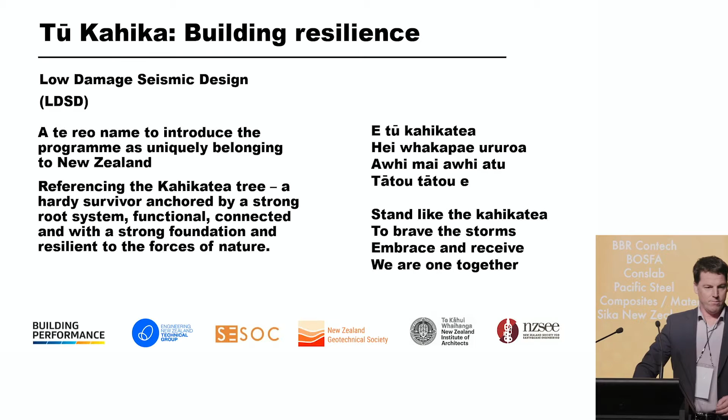This is an MBIE-funded project, project managed by Engineering New Zealand. We're adopting an iterative and collaborative approach. Most of the content is being developed by the working group, including representation from architects, structural, geotech, mechanical, services, fire, and facade engineers. That's because low damage seismic design is not a structural engineering problem - I'll repeat that, it's not a structural engineering problem. It's a whole building issue, so we're getting input from everyone relevant. We're developing this content with our audiences - building owners and others - to ensure the content we deliver is what you need. So we're keen to get feedback on this.

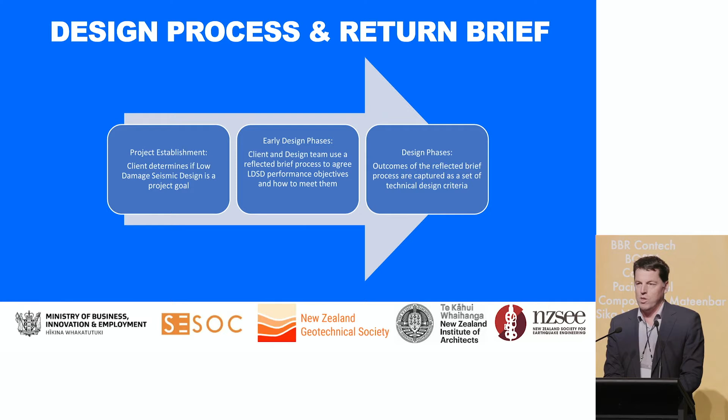This slide outlines the typical design and briefing process we're recommending. Essentially, first we need a client that wants a building, and then that client needs to decide if they want seismic resilience or not. Then early on in the design phase, once the design team has been engaged, that design team needs to have a discussion with the client, and hopefully through a reflected briefing process, which I'll talk about shortly, they can agree on what the low damage seismic design performance objectives are for their project. Outcomes from this process then need to be translated into a set of technical design criteria the design team can use.

These are the three sets of information being developed for building owners, users and tenants. The key thing is they're written in plain English - our clients aren't structural engineers, they don't really care about structural engineering, they just want a good building. So these documents are intended to help clients decide if seismic resilience is a goal for their project. In plain English, they explain what low damage seismic design is, the benefits of low damage seismic design over code minimum, and also clarify what percentage NBS is, which is always a bit of a bugbear. It also includes a briefing guide, which I'll go into in a second.

Right, the briefing guide - here it is. The key objective is to educate building owners, users and tenants so they understand the basic concepts of what low damage seismic design is. This is really important because often decisions on site selection are made before the design team is engaged. What we've learned from our experience over the last few years is that if low damage seismic design is going to succeed, you need to think about it early. Going back to the site selection dilemma, there are some sites where low damage seismic design won't work, or it's uneconomic to implement.

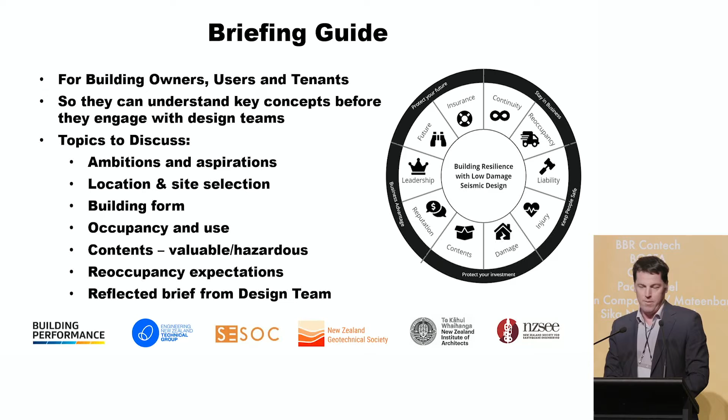Once we have engaged a design team, the next thing they need to do is have a discussion with their client to understand what the client wants. That's really important because it's their building. To help with this task and these decisions, we are developing, as part of this documentation, a series of topics for discussion to help establish what our clients' needs are in terms of the seismic performance of their building.

We'll be asking questions such as: what is the building going to be used for? How important is it for you to get back into your building straight after an earthquake? What sort of contents does your building have? Are they valuable? Do you have other buildings you can use? Once you've had these discussions with your clients and got their feedback, you can then turn this into design parameters which the design team can use to design the building.

And I'll hand over to Paul for the next slide. Thank you, thanks Stu. Game of two halves, we're just at half time.

So having had a discussion with your client, and we are suggesting the types of questions you might like to ask, because that's in plain English, we then need to turn that into some agreed design parameters. Again, the documentation is coming up with suggestions. That's not an exhaustive list, that's just a sample of what we've got.

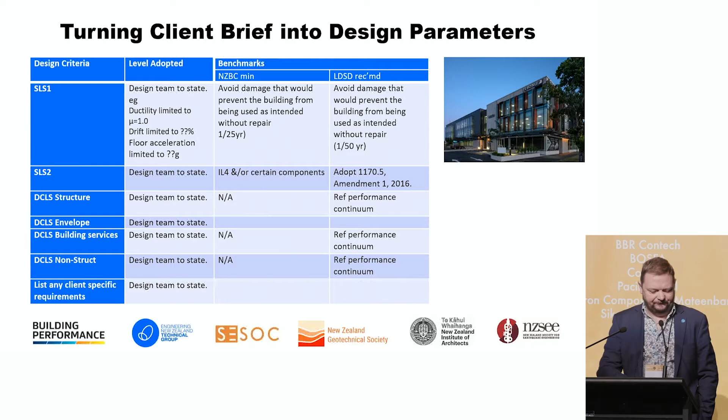Suggested performance objectives. Before I get into what we're currently suggesting, just the philosophy is, in terms of safety, that's addressed by the New Zealand Building Code, and we're not going there.

When it comes to damage and recovery, again going back to the plain English, we're actually defining damage in terms of insurance terminology. So we've got estimated or expected annual loss, and as one of the measures, we've also nominated a 5% threshold of damage of replacement building cost, and these are probabilistic values. Then we're talking about recovery time, and that even gets a little bit more probabilistic, shall we say.

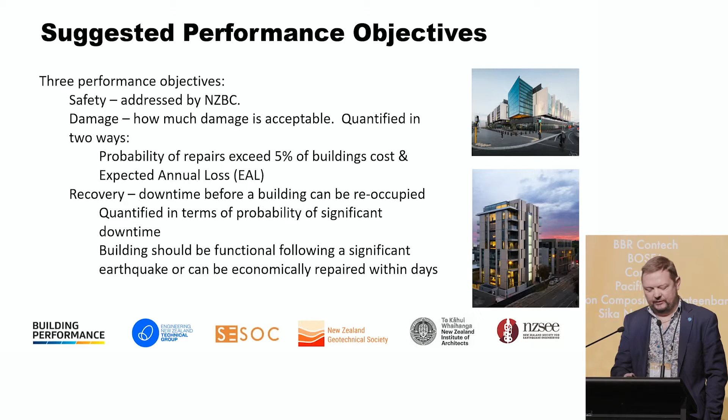I'll flash this slide up, not really wanting to spend too much time on it, but knowing engineers want some of this detail. Whilst we're focusing this talk on the client-based document, in terms of the current suggested performance objectives, we've got this notion of good, better, best in terms of a continuum, and we are testing at the moment against certain return periods. It's important to note that we've introduced a new limit state called the damage control limit state, the DCLS. The figures we're nominating are not magical figures - they're actually in the Ministry of Education structural geotech requirements in terms of return periods. So we've just used those as a placeholder at the moment.

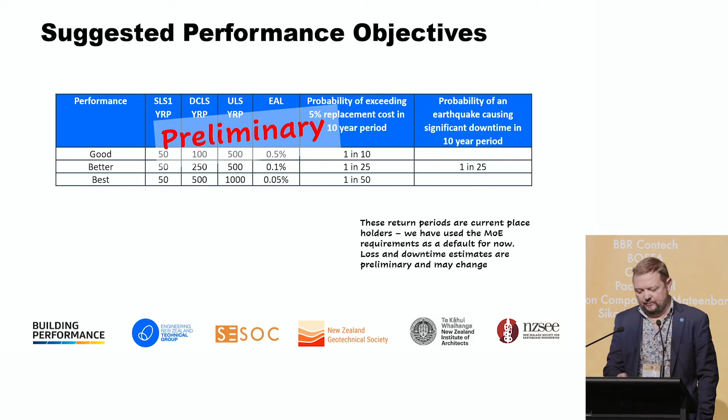So where are we at now in terms of the project? We're about to embark on a benchmarking exercise. We've got most of the way through a lot of the work.

We paused and asked, okay, we've chosen these performance criteria, but how does our building stock actually perform against them? The concern was we're walking a tightrope between a stretch goal that's achievable and turning the client community off by going down this low damage path because it's just too hard for them to achieve.

So what we're doing is we've got a performance continuum, and I've got a slide on that next, where we effectively want to run past some buildings that have currently been built. We're trying to select buildings where the design team or client team say they're better than code performance. Whether they achieve full low damage or not, we just want to see where they fall on that performance continuum, to know whether we've got the settings about right or whether we need to tweak them up or down a little. So the scope of the project is we're going to select around 15 buildings.

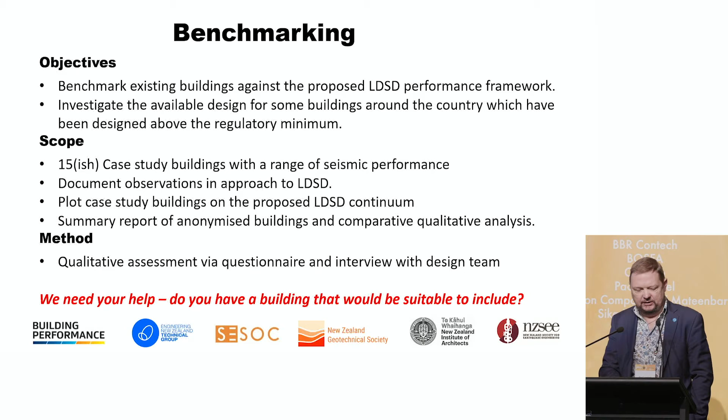So big bold red lettering down the bottom: we need your help, please. If anyone's got any buildings that they know of that are complete, that they've been involved in, where the client and design team's aspirations were significantly better than code, or at least above code, and you think your building would be a great case study, please come and see Stu, myself, or any of the Engineering New Zealand team, and we'd be delighted to have a further conversation with you about including your building in the study.

Again, same as before, what we're doing is we've suggested some return periods that we're going to call the damage control limit state. Those return periods are nothing more than placeholders out of the Ministry of Education guidelines, and that's all -- I've got to stress, this is all very much work in progress. But this is what we're going to test the buildings against. Depending on the outcome of that study, we may tweak these up or down, or leave them as they are -- we just don't know yet.

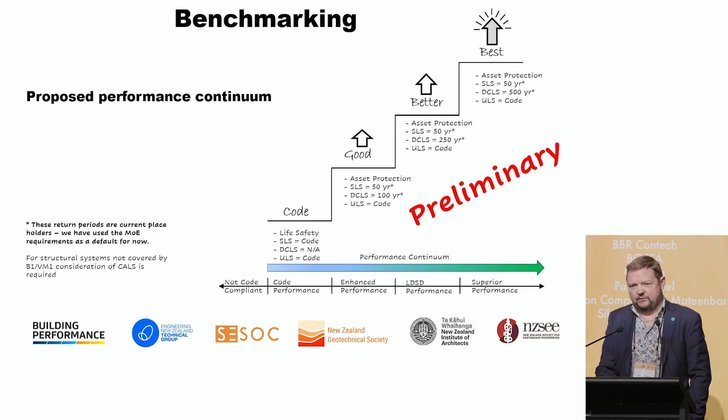Next steps: as I said, the benchmarking. Please, if you've got any buildings out there that you think would make a good case study, we'd love to hear from you. Otherwise, we're probably going to just try and shoulder tap people.

That benchmarking study, the plan is to deliver later this year. At that point, that'll give us a steer on where we are in terms of our performance continuum, and how much rethinking or not we need to do.

Once we've got the benchmarking and understand where our performance continuum sits, we've got to finalise the documentation, and then -- really importantly -- we've got some world-renowned experts, so we're going to do a peer review and test with stakeholders.

That's effectively the three documents that Stuart talked about at the start: the building owner stuff, the design team stuff, and the more general brochure type stuff.

So assuming we get the big tick on all of that, the goal is to publish next year. We're not yet sure, depending on how the peer review process and all that goes, what the form of that publication will be.

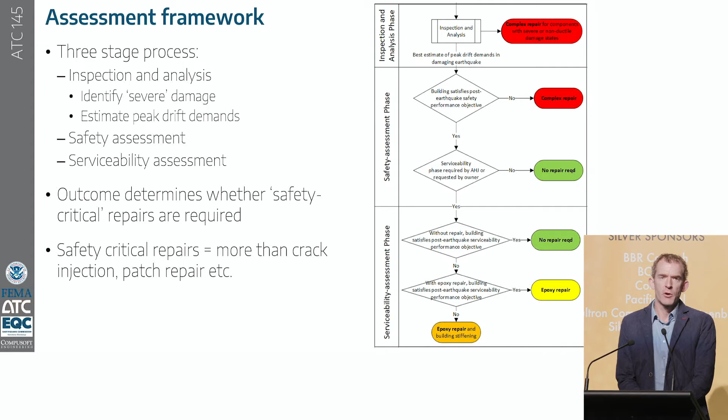And that serviceability assessment is interesting from a US perspective. I hadn't realised that they don't actually really consider serviceability earthquakes in the design of their buildings, and so there's treading on eggshells a bit to make sure you're not putting an onus on building owners after an earthquake that was probably never there when they were actually consenting buildings in the first place.

You obviously need some objectives with any assessment of a damaged building - performance objectives, or what a repair is trying to achieve if a repair is required. So the project set up these two objectives that essentially have unchanged performance in a future large earthquake, so the building's roughly or approximately as safe as it ever was.

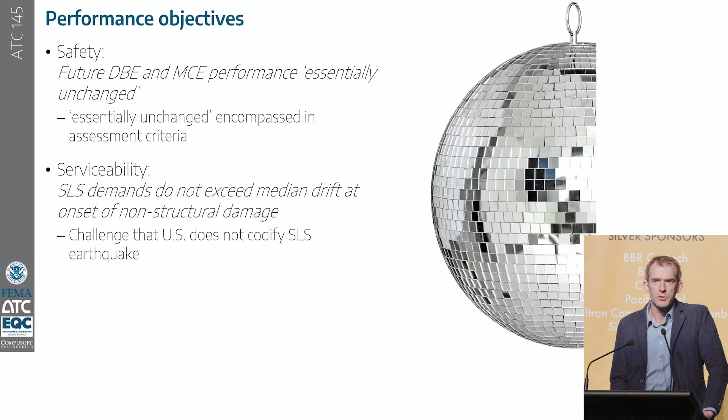And then from the serviceability perspective, something that in a New Zealand context is probably reasonably obvious - you'd be looking for a building to be able to withstand a serviceability earthquake without sustaining any major damage, being able to be used and probably being largely undamaged. But as I've alluded to, in the US context that introduced a whole load of question marks, because they don't even actually define what an SLS earthquake is in terms of return period and so forth.

Now, the bulk of the presentation here today, I think, is really focused on the inspection and analysis phase. Some of you will have seen the presentation I gave at the NZSEE conference that focused on the safety assessment phase, and I'll reference that again later on. But really here, I think we're talking through what is kind of a looping process of inspections, followed by analysis to work out what's going on with the building, using that analysis to inform further inspections, and working through until you've got comfort that you have an analysis that realistically matches what happened in the building.

It's not to say it's an absolute forensic perfection of knowing the rotations at every single joint to the nth degree. It's a sufficient match for what's required, and we'll talk through a bit more on what that might mean. And something being emphasised in the newer versions is the concept of easy outs.

Everyone's been to a building, maybe one you think is going to be likely quite damaged because it's an older structure, and you look at it and go, well, for whatever reason, this building's no worse off than it was prior to the earthquakes. In that situation, you don't want to be spending a whole load of time and resources, both in terms of owner's cost and potentially scarce engineering resource, crawling over every inch of a building that really doesn't warrant it.

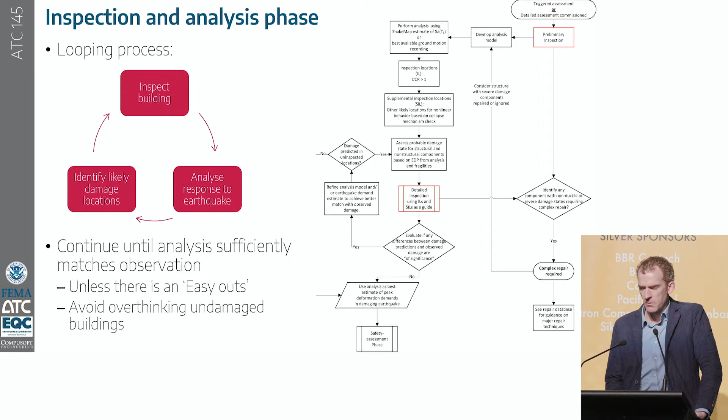For the ATC project, the inspections are given two purposes. There's the obvious one of looking for severe damage, which everyone will have been doing anyway, and things that obviously necessitate repairs. So if you go to a building and find that half the columns have shear failures, you probably drop out of the process of do you need repairs and start thinking about how you might do it.

But in terms of the broader concept of a building that's likely moderately damaged, and the question of does this need repair, the inspections play a really important role in calibrating whatever analysis you have. Because really the aim of the analysis is to get a feel for how far the building's moved and what that's going to mean for it. To have confidence in that, you need to know that your prediction of 1.5% drift, or whatever the number might be, matches up acceptably well with what you're seeing on site.

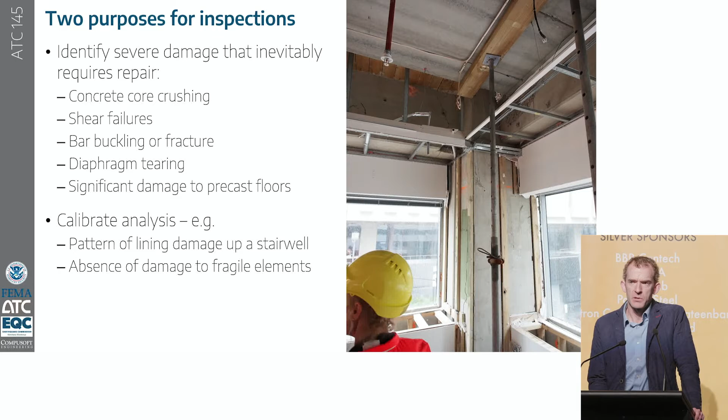The analysis is set out in a framework that ties in a lot with ASCE type documents, and in the paper there's more discussion about linear dynamic procedures and non-linear static procedures, with the obvious overlay that the analysis used for a particular building will be informed by what you see with the building. If it's a simple structure with very minor damage, a linear analysis might be perfectly acceptable, or even hand analysis, which we've heard about this morning, could be sufficient. On the other hand, if it's a complex layout with plastic hinging here, there and everywhere, you'll probably need something much more sophisticated to get a handle on what's going on.

One of the key challenges is how to represent the likely earthquake shaking. We've been pretty fortunate so far in New Zealand to have dense arrays of strong motion recordings, but the project's had to consider situations that exist in most of the world where maybe you've got a recording within 10 kilometres, maybe you don't, and what sources of information exist for that, and how that might change heading into the future.

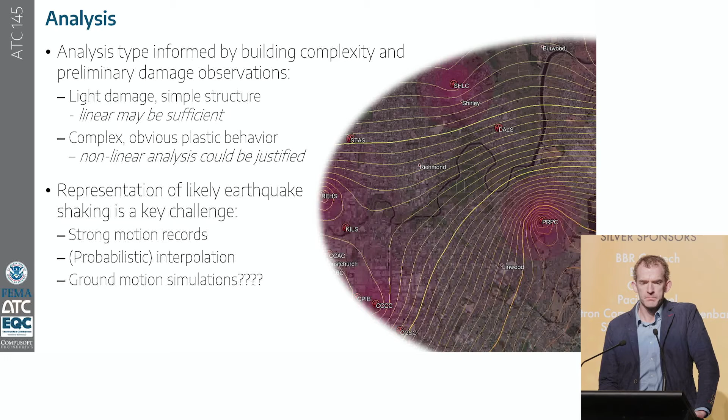The key output from the inspection and analysis phase is really to identify what the likely deformations in the building are. The primary indicator is probably the drift imposed, but depending on how the assessment phases go, you might be looking at chord rotations in critical beams as well. So criteria that we're fairly familiar with from assessment processes and general engineering.

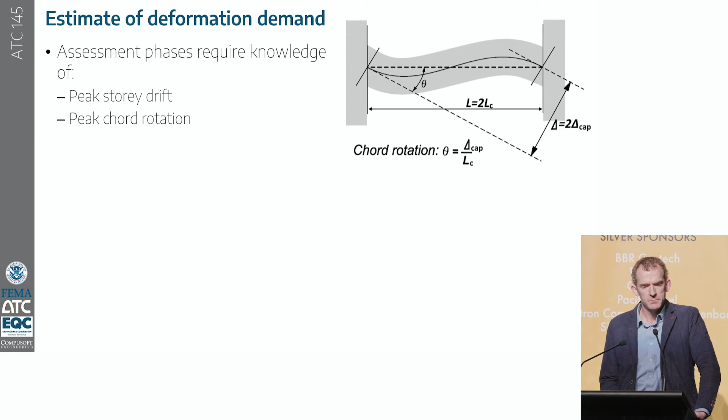As I've already said, you really need some confidence that the estimates you're getting are realistic. They don't need to be perfect, and the level of perfection required depends on whether you're close to some threshold values that exist in the assessment processes, but you're going to need to try and tie them to what's seen in the building. You might be using crack widths, with some caution required there, and an understanding of what's driven the cracking, and the axial load that might have caused closure of cracking or might not, depending on the situation.

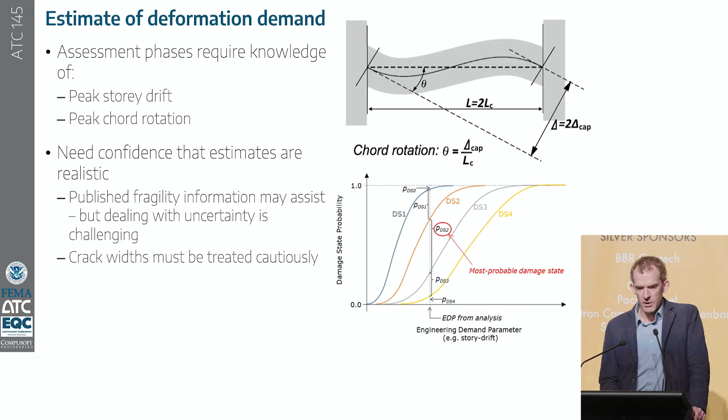The other thought that's fairly appealing is use of existing fragility information. So you might have a gib partition wall running up your stairwell and know that it has a certain probability of being damaged for a certain level of drift. But there is some challenge in that as well. One of the project team described it quite colourfully as trying to pour water through a funnel backwards. You end up in a situation where a certain observed piece of damage can have quite a wide range of interpretations. So it really needs to be a holistic look at the building to get a feeling for what's happening.

In a lot of circumstances, the situation doesn't need to be resolved to a high degree of accuracy. We'll talk briefly in the safety assessment phase that for ductile frames, 2% drift is a fairly key threshold the project's arrived at. So if you're close to that threshold value, you'd want a fairly accurate answer. If you think you're at 1.9% drift, you'd pay reasonable attention to checking that. Whereas if you can see clearly the building's at 1% drift or thereabouts, or at 3%, resolving that to any finer degree of accuracy probably doesn't really matter.

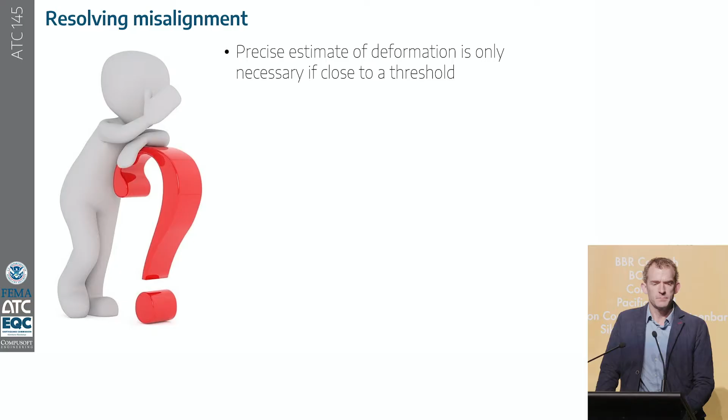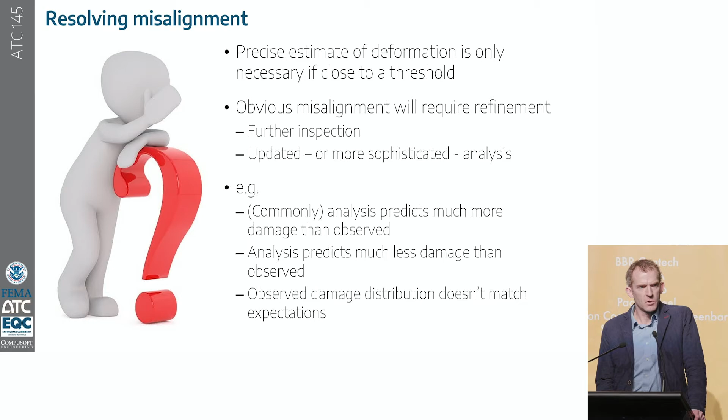If things clearly don't match up, there will be this looping process we've talked about. A common situation, you'll over-predict what's happened. There's a lot of conservatism in many of our processes at most steps of the analysis, so you can quite easily imagine a scenario, and it's been commonplace in New Zealand, where the building's obviously not moved a lot, but any form of analysis will tell you it has. Then some less common but potentially equally tricky situations may also crop up.

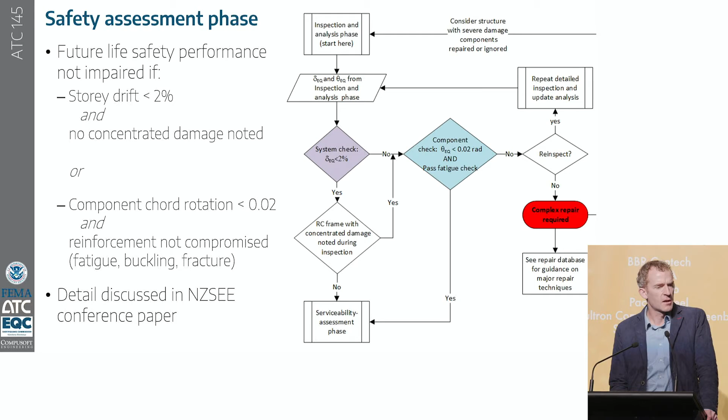So moving through, assuming we've got a reasonable estimate of our drift demands, you then move into the compulsory safety assessment phase. As I said, I've talked through this in quite a lot more detail, and it's discussed in another paper. For today, given the time constraints, it really comes down to a two-step, or two alternative criteria to check.

The first being, for a ductile frame, if the story drift's less than 2%, and you've not got unexpected concentrated damage, no indication of a soft story starting to form or anything like that, then the future life safety performance has been assessed by the project to be effectively unchanged. Or alternately, if you don't pass that check, there's a second avenue where you can go down checking the rotations of specific critical elements and checking the condition of reinforcement to make sure it's not fatigued or buckled excessively. Again, you can get to a situation where a lot of frames with reasonably moderate levels of damage will be shown to have really no change to their life safety performance.

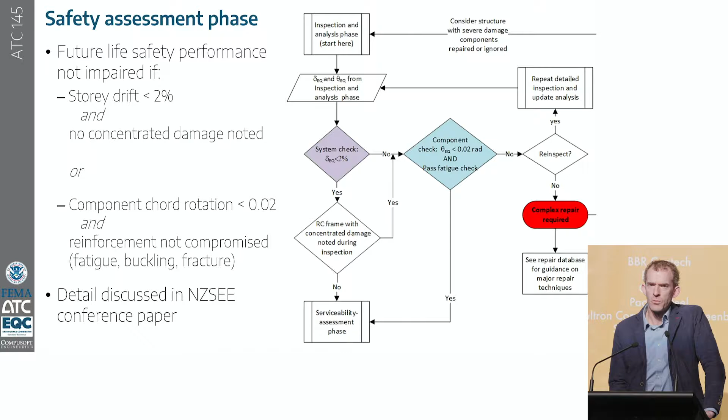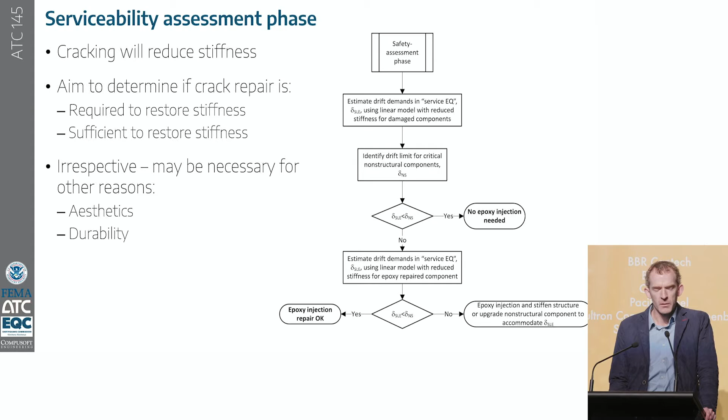So then finally, and within reason at the owner's discretion, certainly in a US context where there's no real mandate for a government agency to come along and get you to check serviceability, you'd move into the serviceability assessment phase. Fairly obviously, if you impose some cracks on a building during an earthquake, that will change the stiffness of the building. So the aim of the serviceability phase is really to check whether that cracking needs to be repaired, and whether repair of the cracking would be sufficient to restore the stiffness lost to a degree that's acceptable. Noting, of course, there may be other drivers for repairing the cracking as well, owner comfort or whatever, but this is really focused on the structural aspects of things.

As I touched on earlier in the presentation, the check basically is to look at whether a hypothetical future small earthquake, a service level earthquake, is likely to cause damage to non-structural elements or structural elements, but obviously the non-structural is probably the focus. If it does, there'd be a requirement or suggestion to restore stiffness. If not, there may have been some degradation, but the building owner can probably be happy that the building's not going to be problematic, and they can really restore things at their leisure.

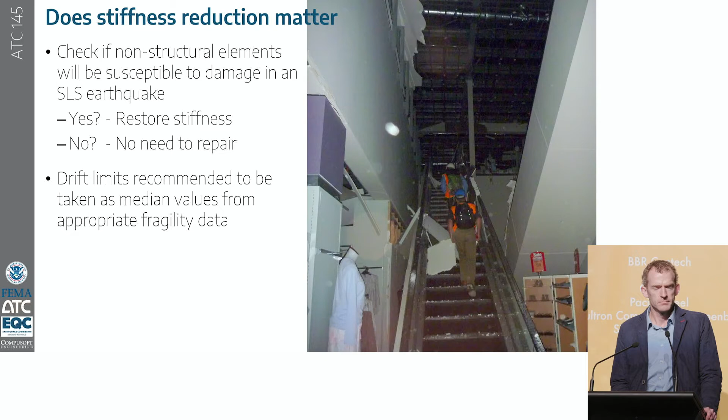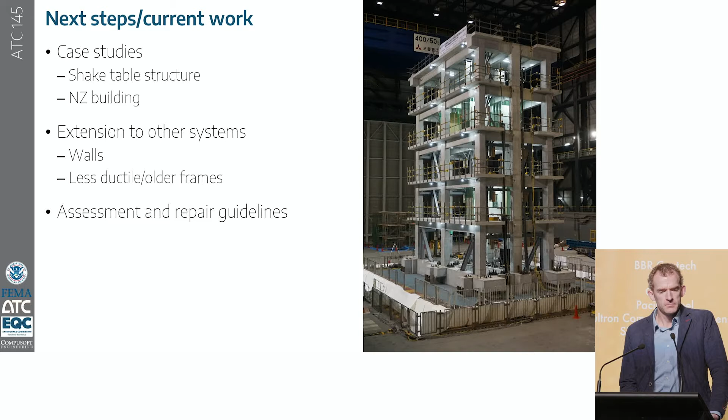So I'll just finish by acknowledging again both the entire project team and my co-authors on the paper, and also the funding from FEMA, and then more locally and directly relevant to me from EQC, for making the project happen. Good, thanks.

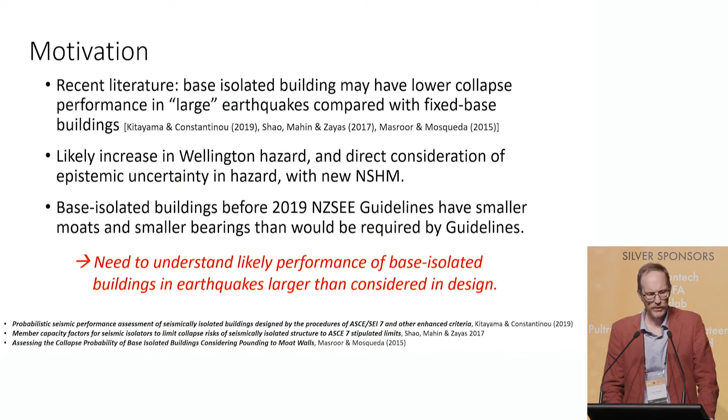So we're going to need to be prepared for those larger than expected events. We also know that many of the base isolated buildings - some of the very first base isolated buildings in the world - are in Wellington, and they were designed prior to the NZSEE guidelines of 2019. So they may have smaller moats than what those guidelines require. We need to understand the performance of these buildings if we see these larger than design events.

Look, I'm not trying to do to base isolation what we've done to hollow core. It's not the same. But I think it's important that we understand what these gold-plated systems will do in these large events.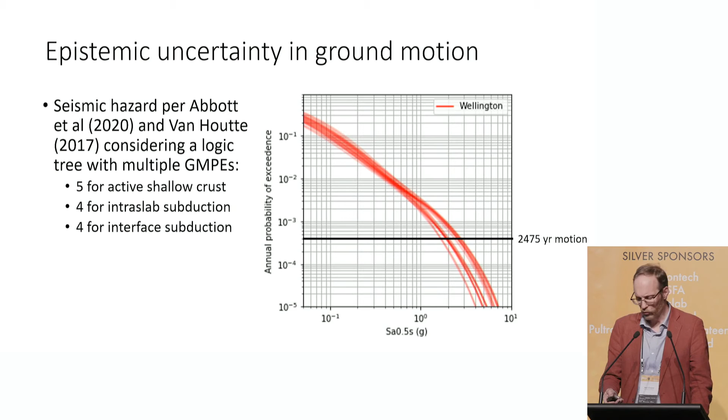So we need to consider a range of ground motions at that level. We chose 11 motions to match 2 spectra: one which was the median 2475, and the other a 90th percentile 2475 - these are big motions. We matched 11 motions to those spectra and we'll use those 2 sets as we go through here today. By the way, we did all the same thing at 475 or 500 year, and they performed beautifully, as we would expect.

So let's just focus on the 2475. Here's our building model - this is a sort of exploratory study. Our building model for now is simply linear elastic, 5 stories on base isolators, modeled using this hysteresis shown here. But the important part of our study was this: what happens when it hits the moat wall.

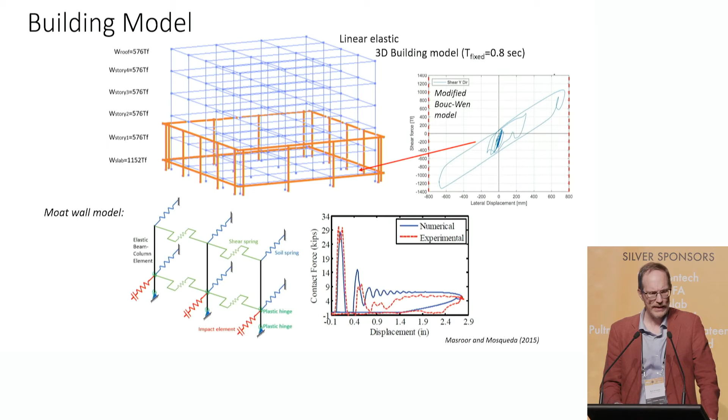My friend from UCSD has done a lot of work on this, on what effect that pounding has and how you model that pounding with the moat. They've developed the model shown here, so we incorporated that as well. Bear in mind that everything I'm going to show you here is a linear elastic model for the building itself, because that's how we would like to see our base isolated structures mostly perform.

I will come back at the very end, if I have time, to talk about what happens if it is a nonlinear model.

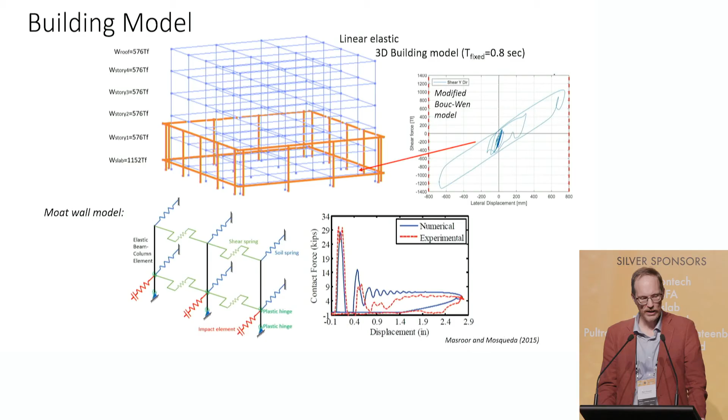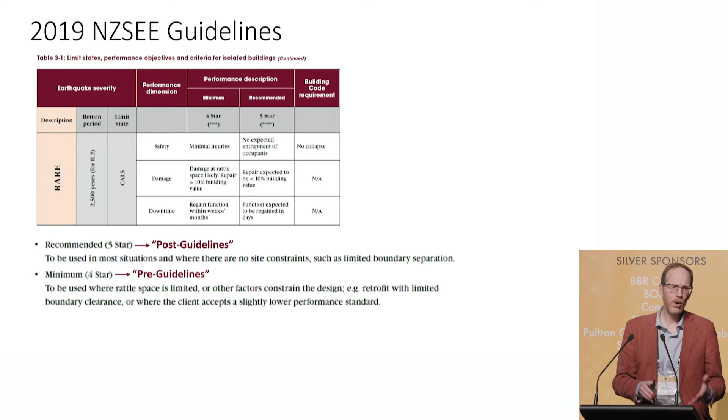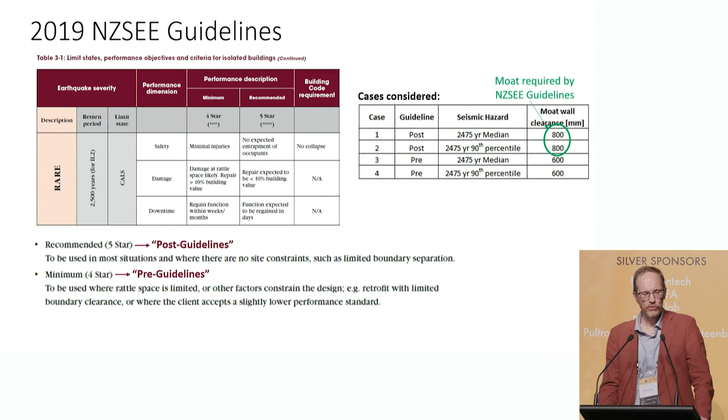Reflecting on the guidelines from NZSEE, or draft guidelines for base isolation, we identified a category of a 4-star rating and a 5-star rating. We called the 5-star rating our post-guidelines buildings, because I think that's what they're really recommending one targets. The 4-star rating is like our pre-guideline building, where our moats really aren't quite big enough. So the 4 cases I'm going to consider here are 2 cases with a moat that meets the NZSEE guidelines, and 2 more cases where the moat is roughly equivalent to the average moat in Wellington base isolated buildings right now.

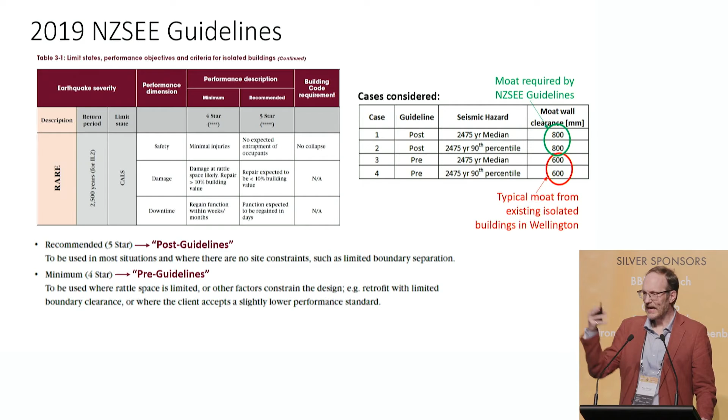And for each of these, I'm going to consider the median hazard and that 90th percentile, the really big hazard.

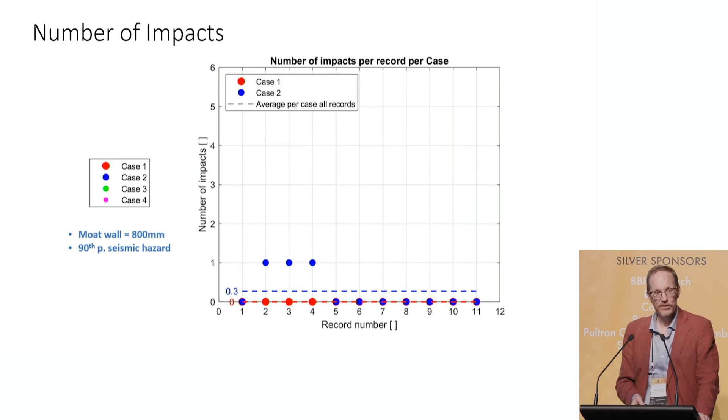Okay, so first of all, the question is how many impacts do you get? Case 1 was the NZSEE guidelines moat of 800 millimeters and the median seismic hazard - no impacts. Good news. What if we push that up to the 90th percentile seismic hazard? Now we've got 3 of our ground motions producing impacts. Still not too bad, but we've got to deal with those impacts.

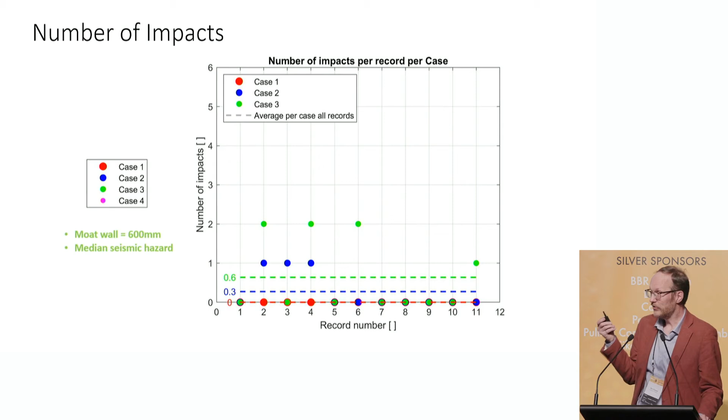What if we go down now to the 600 millimeter moat? Now we've got 4 producing impacts, some of those producing multiple impacts. And finally, if we go down to the 600 millimeter moat but give it that big ground motion, 90th percentile, now we've got 9 out of the 11 motions producing impacts, some of them many, many impacts.

Now, what does that mean? So what if there's an impact? What does it mean? We're going to capture that in terms of the impact velocity. How hard is it hitting? If it just touches the moat, that's not a big deal. It's when it hits it hard.

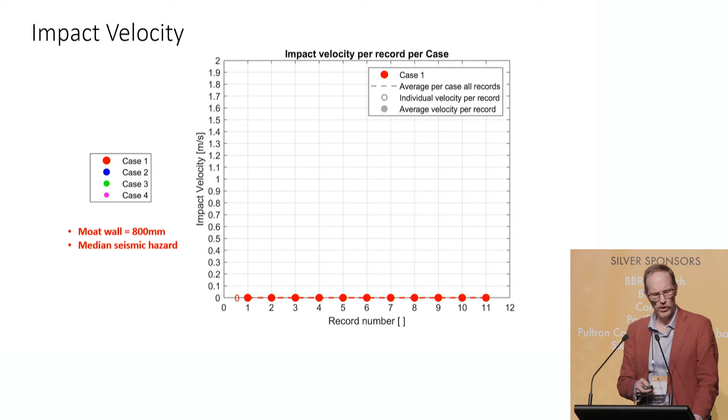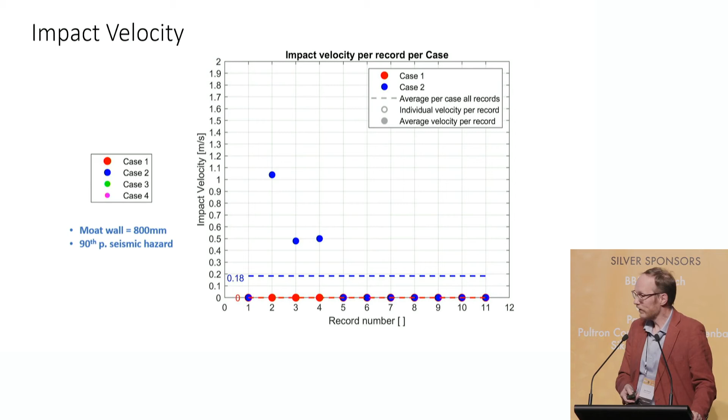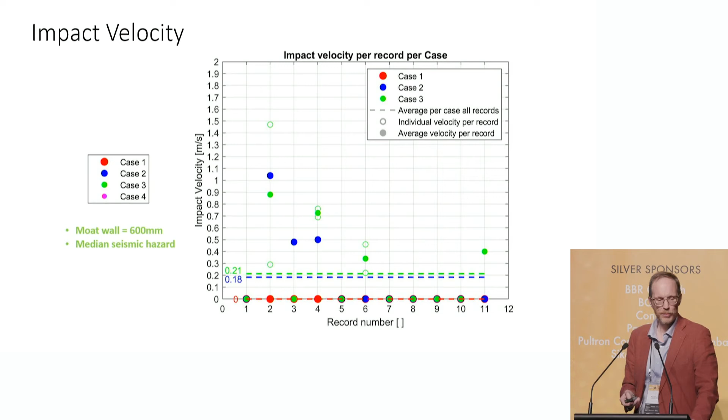So case 1, of course, there were no impacts at all, so no worries there. Case 2, we've got a little bit higher, and at least one there going above an impact velocity of 1 meter per second, which I'll use as a benchmark in a moment. And as we go into the smaller moat, we start to see multiple impacts for each of these ground motions hitting. And when we go to that small moat with the 90th percentile, we've got a lot of impacts going on and a lot of high impact velocities.

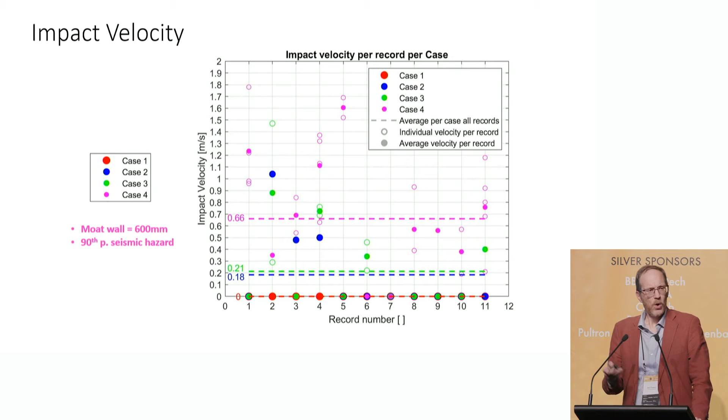Why does impact velocity matter? Essentially, impact velocity is going to lead to higher drift demand in the building. In this plot, on the left-hand side, you can see the story drift demand within the building when you don't have impact, and those are pretty reasonable small values, which we would expect for a base isolated building. All of the other dots are the drift demands when we have impacts, related to the impact velocity on the x-axis. So as the impact velocity gets higher, you get higher drift demands.

Just as a simple rule of thumb, because that's a lot of dots on the screen: if you have a strong impact — and I'm calling a strong impact something over 1 meter per second — you can expect your drift in the building to be probably about twice what you would have thought it would be without the impact. Nice rule of thumb. Remember though, this is a linear elastic model, so that'll probably increase.

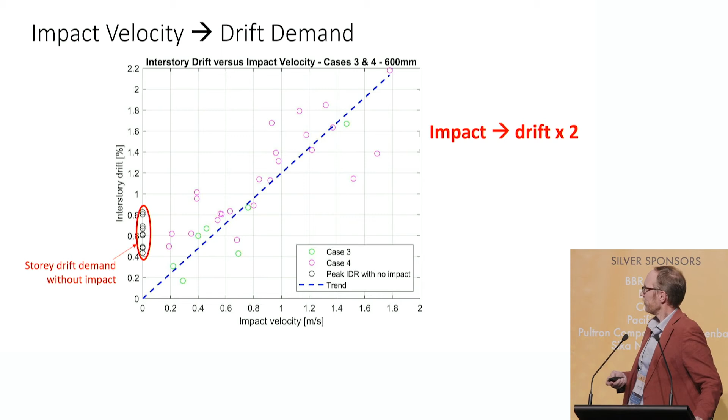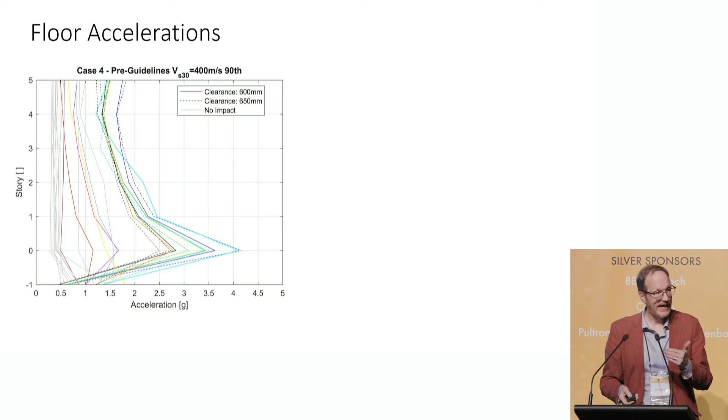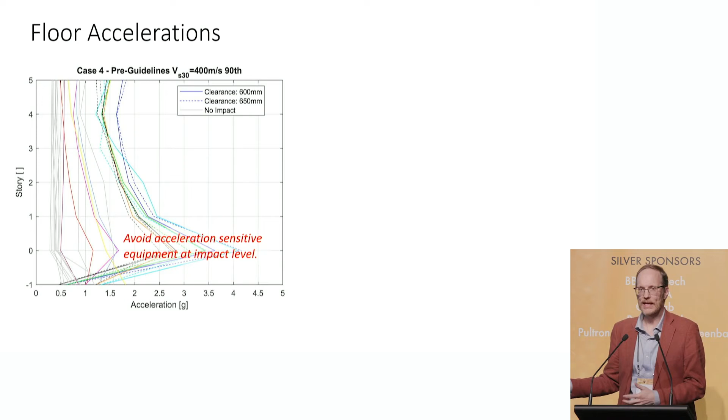One of the reasons why we do base isolation is to reduce the floor accelerations. All those gray lines on the far side are the cases without impacts, and for a case without impacts we get very low floor accelerations. Then these cases with the big spike are where we get impact at that level, and we really can't avoid high accelerations where we have impact. So the first rule of thumb would be: if you're doing a base isolated building and trying to protect acceleration sensitive equipment, you probably want to keep that equipment away from the level where you might get that impact.

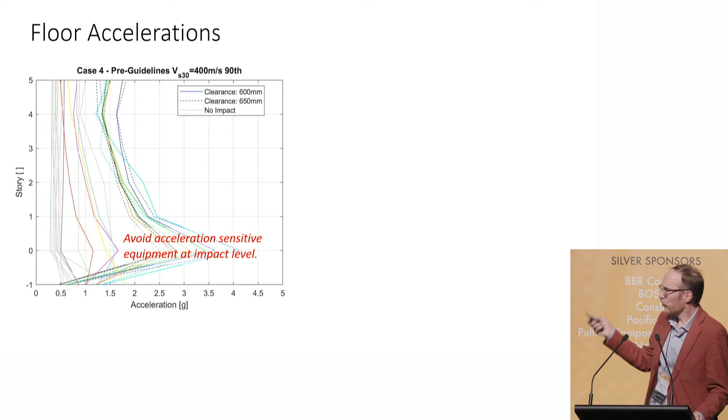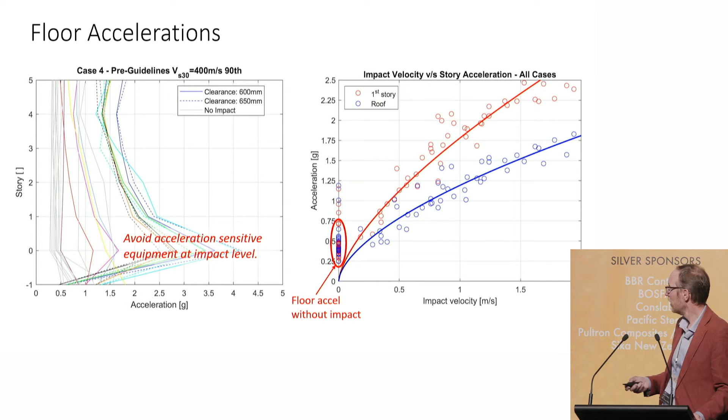How about the stories above? The accelerations go down, so maybe they're manageable. We'll do something similar to what we did before. Over here on the left side, you've got the floor accelerations without impact — generally less than 0.5 g in this case — whereas the accelerations going up the building are higher if we get impact, related to this impact velocity. Again, as a rule of thumb, roof acceleration might be 3 times the acceleration you expected without impacts, and the first floor above your impact level might be about 4 times if you've got a really strong impact.

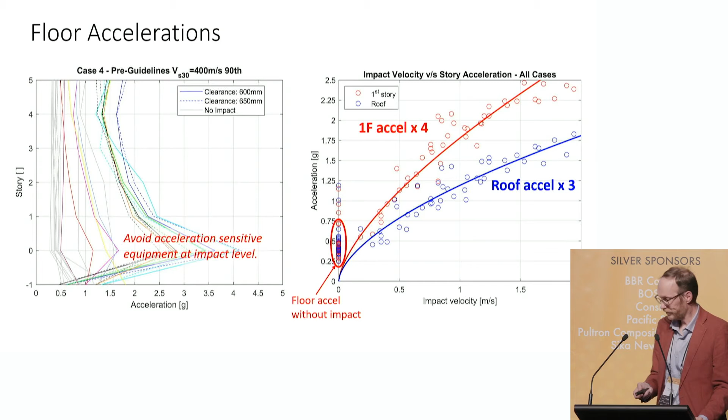So what to do? There are all these buildings out there in Wellington that have base isolation, but with small moats. We could just try to dig a bigger moat, but that's sometimes difficult — maybe not your land. So what else is there to do?

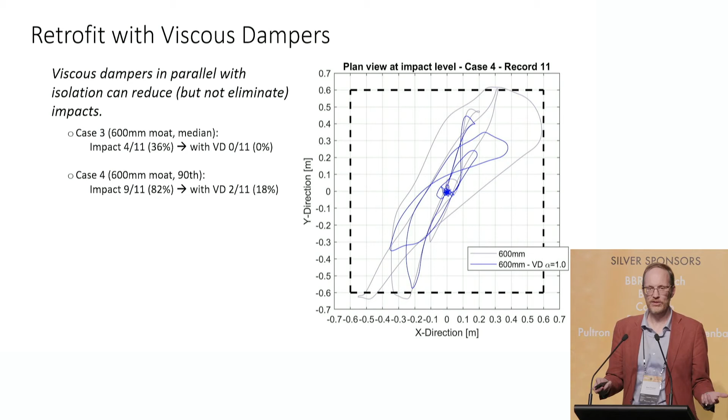What we explored was putting viscous dampers in parallel with the base isolation, and it actually did a really, really good job. In case 3 here, we basically eliminated all of the impact cases — that was with our median ground motions. For our 90th percentile, that really big earthquake demand where we had lots of impacts, we got that down to only 2, and those 2 had pretty low impact velocities, so the impact on our drifts and accelerations was not that bad. So viscous dampers in parallel with these older base isolated systems might be one solution.

So key takeaways from my perspective: epistemic uncertainty — that's that band of the hazard curves that we get out of the National Seismic Hazard Model — really should be considered when setting your moat wall distance, in order to really have confidence of not having impacts.

The pre-guidelines buildings are likely going to have some impacts, particularly when we start looking at the higher hazard values expected in Wellington. If we get those impacts, we can expect to see an increase in drift demand in the building and accelerations. I've given you some rules of thumb there, but you could see the data - it's all over the place, but it's good rules of thumb. We can use some supplemental damping to maybe bring that down.

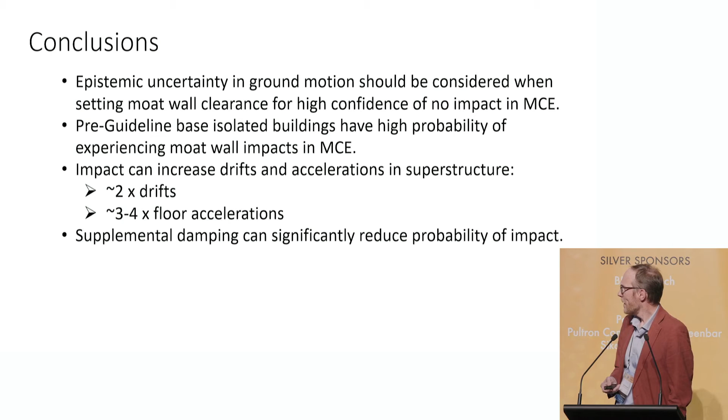But all of this has been with that simple linear elastic 5-story model. What if we go nonlinear? This is quite preliminary, but simply looking at a nonlinear single degree of freedom model instead of that 5-story building, and giving it a simple bilinear hysteresis - what happens?

Well, this is the case without impact. What I'm showing here is the strength of the building - the base shear coefficient for the building, if you will - versus ductility demand. You might say, well, this doesn't even have impact, what's going on? Well, what it's telling us is that once your base isolated building starts yielding, it takes off. This has been shown time and time again in other studies. If you have impact, it takes off even faster, and in fact may even make it worse than the equivalent fixed base building in some situations.

So stay tuned, I think that's a theme of all 3 presentations so far in this session. Stay tuned as we continue this study. But thank you very much for your time.

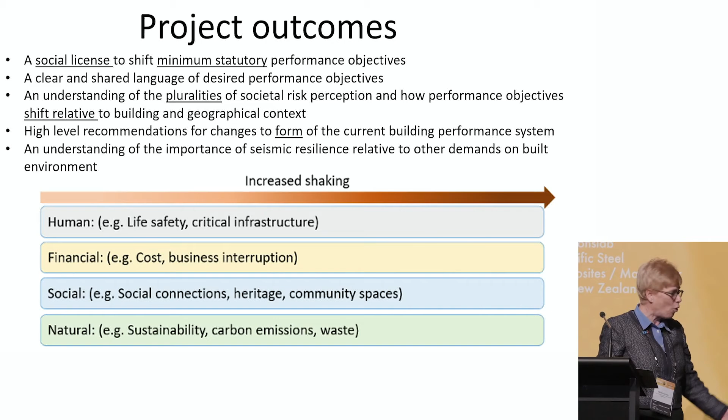The interviews are underway, and we're then going to run a whole bunch of focus groups. But now what I'd like to do is invite various of our colleagues to share their experiences in talking to clients about setting performance objectives for buildings, or whether there was any discussion. I think that's one of the things we have to acknowledge - sometimes it's not appropriate, or it's not needed, or it doesn't happen, for a whole variety of reasons. Okay, so I'd like to hand over now to Michelle to kick it off.

It's a code mark type product, and as long as it's all within the technical manual, we don't need engineers for this system. But there is a conversation still to have with the client, and in this case, buried in the tech manual for this product is that if the Z factor is above 0.15, sliding's to be expected for your slab - that your house will slide around on the ground, in theory.

So Masterton's Z factor is 0.42. So it's worth a conversation with your client if they're building a brand new house and spending multiples of millions of dollars on it - are they happy with that? Do they understand what that means? There is a more robust solution if they wanted to put some shear keys in, but there's going to be a cost associated with that. So it's just a pretty simple conversation to have with them, to explain there's some different options. Do they understand what they're signing up for if they go with that option? It does comply to code, there's no reason that they can't do it. So it's just talking to them about what their drivers may be.

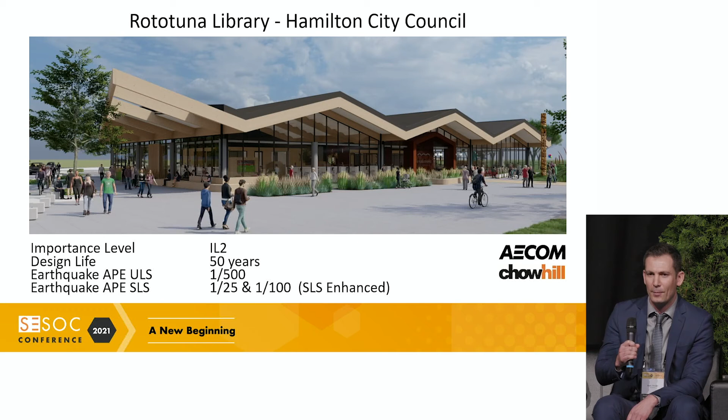So it was an incredibly empowering and positive discussion had with the client, and it's certainly something I would encourage all engineers to do: talk about the serviceability limit state with their clients.

The difference comes in - we could have in some ways rolled out the same structure for both of these, but the clients have a very different perspective on this. On the Ag Research Facility, we have a project-focused client team. We have a project director and a head of infrastructure who were brought in effectively for this project, and they care about making the project successful. They have very much a focus on budget, and they're very experienced individuals who went through the Canterbury rebuild. They've delivered a number of major projects and know what they're doing.

And Ag Research is an organisation that has a number of large campuses around the country. There was a very conscious decision made by the project team, driven very much by the client, that if, God forbid, a quake hit again in Lincoln, their basic strategy was to decant people if necessary and make the most of what they could out of the building. And the discussions around resilience or low damage design on this project were twofold. They said, as far as the superstructure goes, we'll take what resilience you can give us, but we're not going to pay for it.

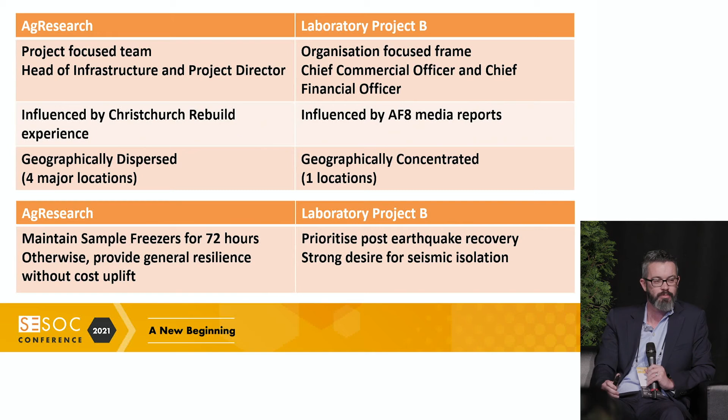It very much caught the eye of these people and of their board, and they actually came to the project saying, we're going to base isolate this thing, aren't we? No matter what - even if it was one story, they were going to isolate it. So it's the only time in my professional career I've actually had to talk people back from the brink of providing more resilience and low damage, and suggest to them that they need a slightly more considered approach and to do something that's appropriate for the project. Maybe I'll get Ken to talk to them.

A fairly basic portal frame building, 20 metres long, 16 metres wide, used for retail storage for an alternative power company. Located in Hawke's Bay, one boundary wall was required to be fire rated.

Concrete panels were used. Clients' expectations were that after a reasonable size earthquake, they may have to do minor repairs. However, replacing the concrete panel walls due to yielding at the base was not their expectation, and having to repair or replace the steel frame due to yielding was not expected either. Hence, the frame was designed for a ductility of 1, but detailed with ductile capabilities if a larger than code earthquake was to turn up.

Panels were simply supported at the base to avoid yielding. The steel frame was fixed base to reduce deflections and hence damage. Rod bracing in the roof, opposite walls were all designed for a mu of 1.

Double reinforced panels could have been used. This option was considered, but they would have still yielded at the base, and we would still have had an issue after a large earthquake. The only downside with doing this option was that basically the steel frame needed to be fire rated because it was holding up the panels.

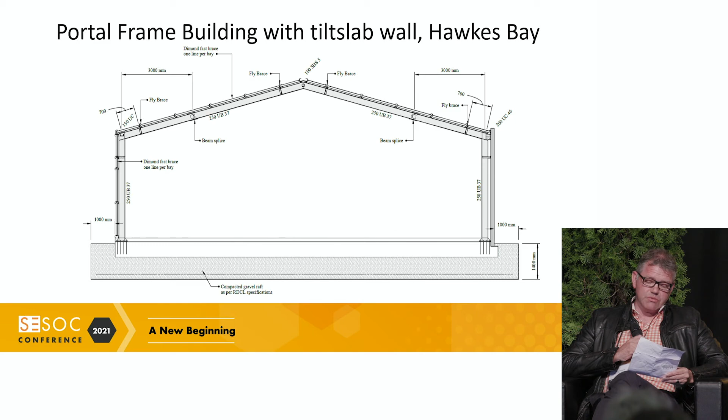So that's the sort of low damage solution that we discussed with the client, and the steel frame was fire rated with a spray composed of gypsum or cement type product. That's it.

Thank you. So this is a new commercial building in Christchurch, and the key driver for our customer for this project was actually getting an anchor tenant.

So the original brief our client got was that the anchor tenant wanted an IL2 building, minimum 130% NBS, rated in accordance with the NZSEE guidelines, and we were also told that the client wanted a resilient building. So that caused a few, some discussions.

What was even more disappointing, I guess, was the fact that the tenant brief had been prepared by a large, well-respected engineering consultancy firm, which I won't name. So it was a bit disappointing to see the reference to the percentage NBS rating, particularly when resiliency was important.

So, as you can imagine, this prompted a bunch of discussions with our client and the tenant and the tenant's engineer, about how the percentage NBS rating is really focused around life safety and has got, well, not that much value in terms of resilience. It's got some.

So this prompted a whole bunch of discussions with our client and a few others, and we ended up, at the end of a few meetings, going with a 250-year return period damage control limit state event.